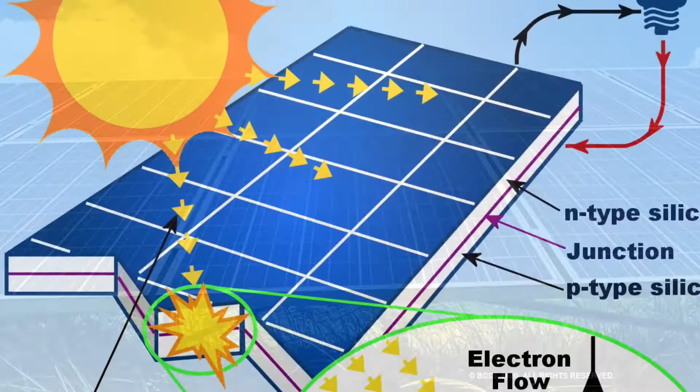There are different types of renewable energy, such as wind energy, which is the energy obtained from the wind, and solar energy, which is the energy obtained from the sun. This divides into two: photovoltaic solar, which takes advantage of sunlight, and thermal solar, which takes advantage of the sun's heat.

There's also hydroelectric energy, which is the energy obtained from fresh water, rivers, and streams, and biodiesel, which is organic fuel for automobiles obtained from vegetable oils.

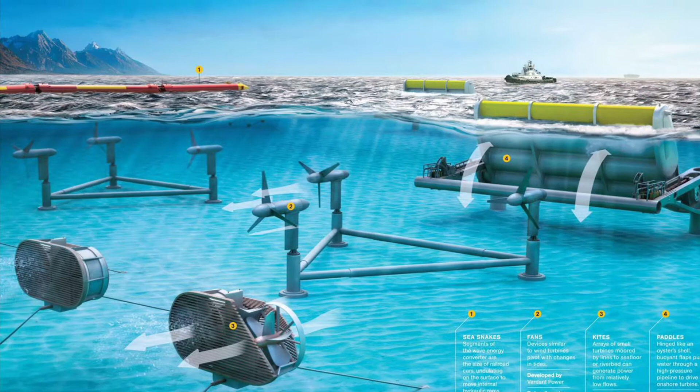Biomass and biogas is the energy extracted from organic matter. Geothermal energy is the energy that comes from the heat contained in the interior of the earth. Tidal energy comes from the tides. Wave energy is the energy obtained from waves. And finally, bioethanol, which is an organic fuel suitable for automotive use.

Talking in a global context, those countries that have a high installed capacity, that is, a great number of plants installed ready to operate, are the same ones that lead the global economy. A clear example is China, with 695.87 gigawatts of installed capacity in 2018, thanks to its huge investments in recent years, mainly in solar and wind energy.

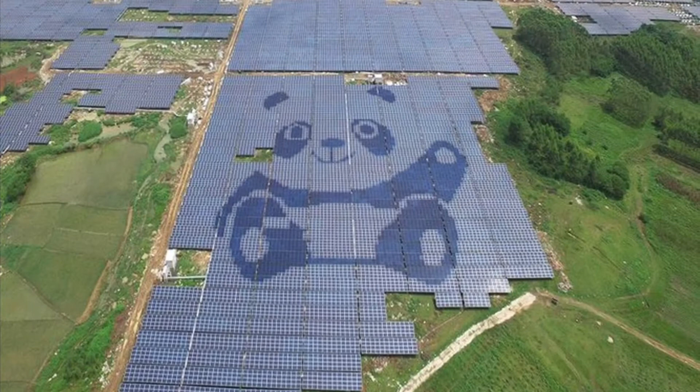In second place is the United States, with 245.25 gigawatts of installed renewable electricity capacity. This country stands out in the development of its cutting-edge technologies.

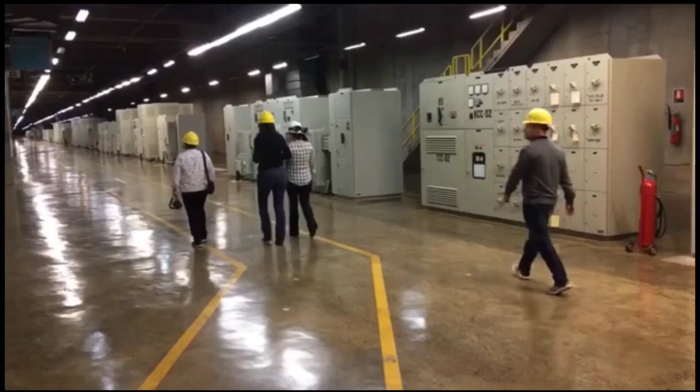In third place is Brazil, with 135.67 gigawatts of renewable energy power, and is a leader in hydroelectric power thanks to its large flows and waterfalls. In Europe, Germany is the pioneer in the use of renewable energies.

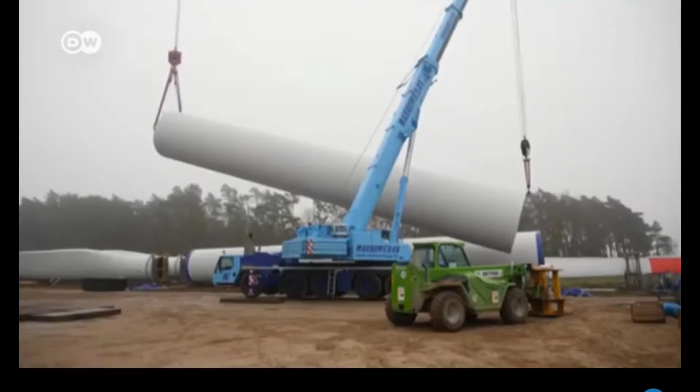During this pandemic, the demand for conventional energy has decreased. This country has just set a record, since about 52% of its energy comes from renewable sources, exceeding 44% in 2019. Well, at present, more than 25% of the energy produced in the country comes from clean sources.

We are a country with potential to contribute to the world, since Mexico promised to generate up to 35% of its energy from renewable sources by 2024, and 50% by 2050. It should be noted that we belong to an area on the planet that is privileged.

In Latin America, it is estimated that at present only 8% of the electricity generated in this region comes from alternative sources such as wind, sun, biomass, or geothermal sources.

Now, focusing on wind energy, this is one of the oldest energies exploited by human beings, and today it is the most mature and efficient energy of all. To produce wind energy, it is necessary to convert the energy produced by the generator blades into electrical energy, or rather convert kinetic energy into mechanical energy.

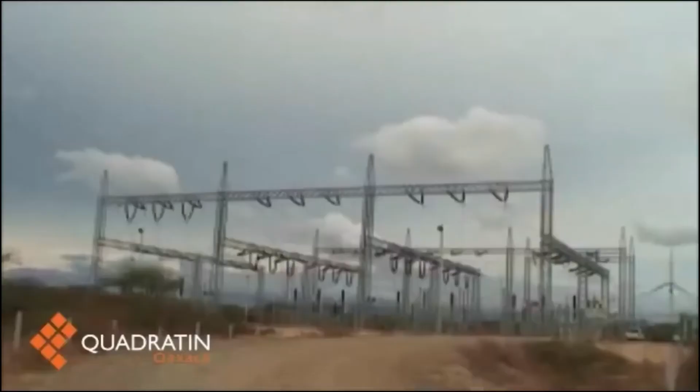The largest producers of this energy in the world are China, Spain, India, and the United States. However, our country has made significant progress in recent years, since according to the president of AMDEE, wind energy increased 26% in its installed capacity in 2019. In addition, the south of the Istmo de Tehuantepec is an area with great wind energy potential, where the deployment of wind projects are concentrated.

In our country, we have different wind power plants. Some of them are Eurus Wind Farm, located in La Venta, Juchitán, Oaxaca; Oaxaca II, III and IV Wind Complex, located in the municipalities of Santo Domingo Ingenio and La Venta, Oaxaca; Ventika Wind Farms, located in General Bravo, Nuevo León; and El Cortijo Wind Farm, located in Tamaulipas State, not counting the multiple areas with unconcentrated turbines that are not considered areas.

For a nation, it is ideal to develop this type of renewable energy because it does not pollute, it is inexhaustible, it reduces the use of fossil fuels, it does not need very specific supervision, it can be used all over the planet, it creates wealth and local employment, and it does not generate waste or water pollution.

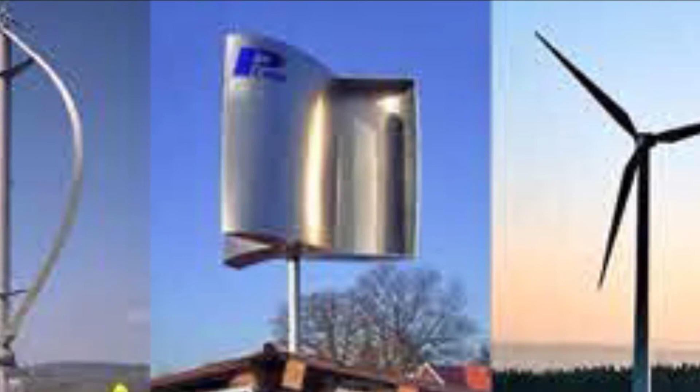There are different ways of harnessing wind energy, but the basic way is by means of turbines that generate electricity. This modern model that we all know, and that we mostly observe on federal highways, had direct precedence with the windmills that are used to extract water from wells.

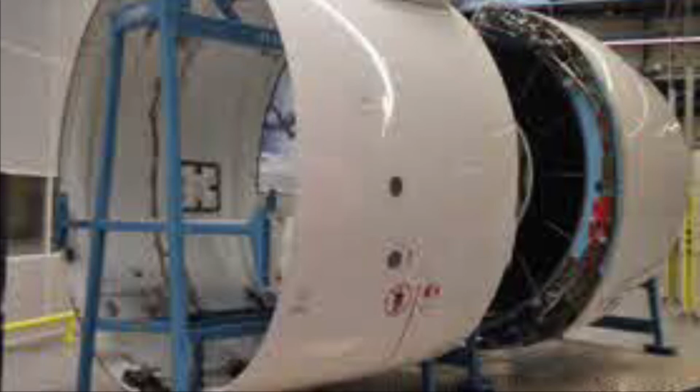These turbines are made up of the rotor, which contains the blades. The nacelle or gondola is a kind of box that connects to the rotor, and inside it is the gearbox and generator.

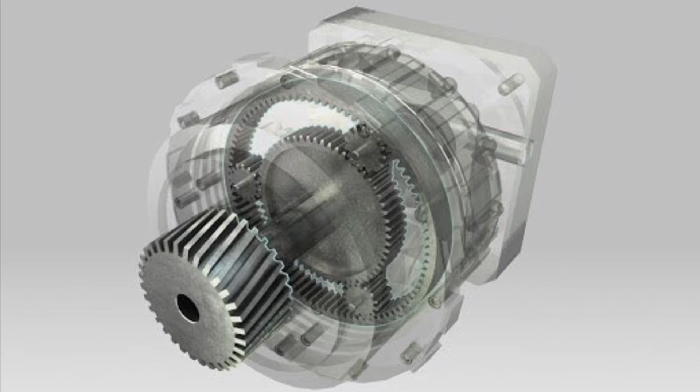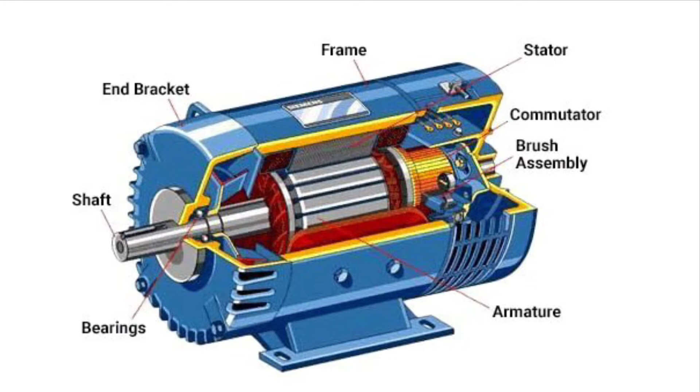The gearbox is responsible for multiplying the rotation of the rotor so that the generator receives the number of revolutions per minute sufficient to transform wind energy into electricity. The electric generator contains a series of magnets and coils that, when rotating, generate electrical energy.

The wind turbine tower is a support structure that supports the nacelle and the rotor. Its interior is also used to climb the turbine and carry the wiring. The tower has a motor that allows the turbine to rotate in favorable wind directions.

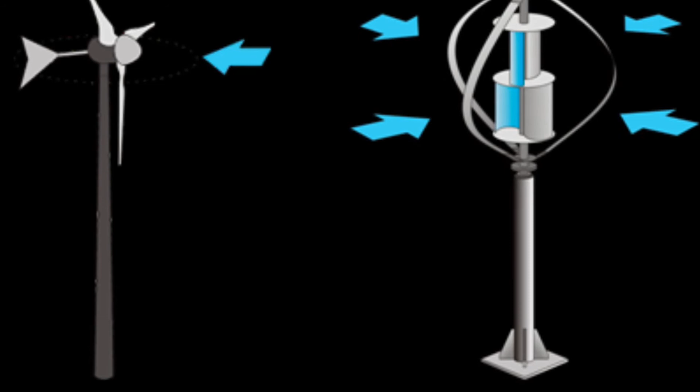For this type of turbine, there are different models based on the orientation of the rotor axis: vertical and horizontal. The horizontal axis is the most used turbine, thanks to the fact that its axis of rotation is parallel to the ground and makes better use of the wind. We can see that the old windmills and wind turbines are included in this type.

The vertical axis is the axis of rotation; it's perpendicular to the ground. They are characterized by reacting and adapting very well to changes in wind direction.

The Savonius type, invented in 1922 by the Finnish engineer Sigurd J. Savonius, converts the power of the wind into torsion. However, they are not highly recommended because their performance and power generation are considerably low.

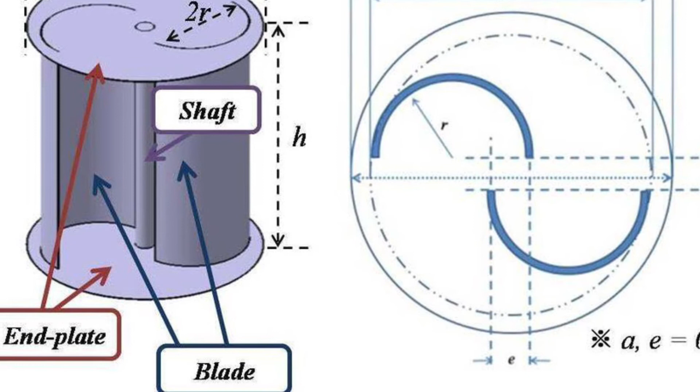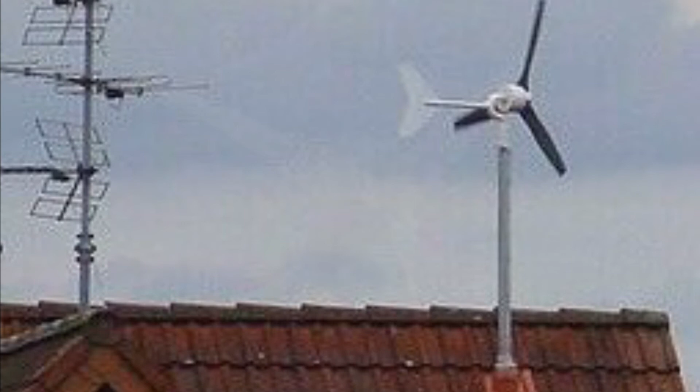Medium power wind turbines are those that produce about 150 kW of energy. High-powered ones produce much more than 150 kW of energy; kW meaning kilowatts, and these are used especially for commercial purposes. The windmill types are low structures, generally with 4 blades, which were built in Europe starting in the 12th century.

An interesting fact is that wind turbines can also be installed in the sea.

On the other hand, before the great opportunity that this system offers us, there are also disadvantages, such as the lack of security in the presence of wind, since there are no warehouses that contain the energy produced.

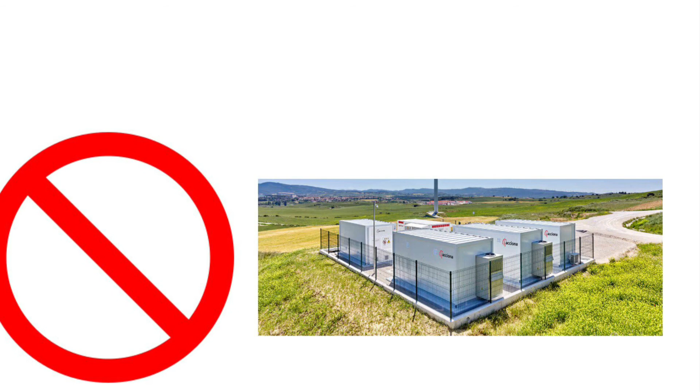Likewise, the blades have a speed limit that cannot be exceeded. It could be catastrophic if the limit is exceeded. To solve this, changes will have to be made in the generation structure.

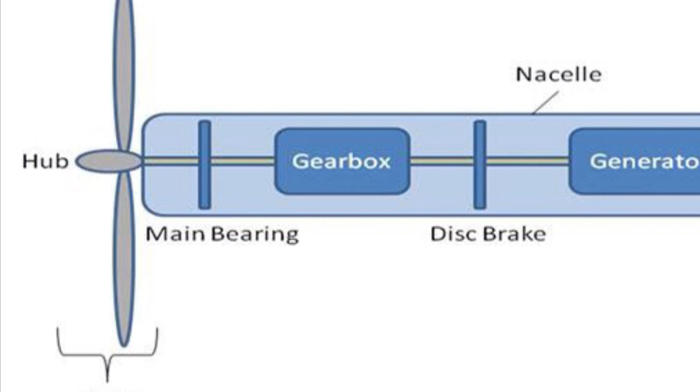The installation, in the same way, is problematic. A large space is necessary for the wind farms. Accidents that reduce the number of birds, bats, and insects have also been reported. This in turn affects the food chain.

As young people, we must contribute to the radical change of this process, which may take us several decades to achieve, but will also benefit us for life.